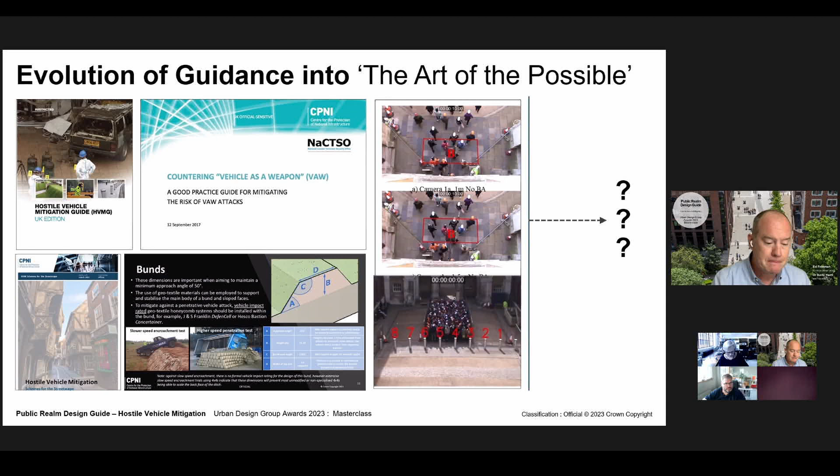There are several key changes in this latest edition of the guide. One is that the guide places a greater emphasis on the protection of people rather than assets such as buildings, which is in response to new emerging threats and terrorist techniques. The guide also considers risk management as addressed in the UK government's emerging Martyn's Law, previously known as the Protect Duty. This update also presented the opportunity to refresh the graphic design, improve accessibility, and coordinate with other updated guidance.

The key overarching message of the guide is to encourage creative thinking, underpinned by a clear understanding of the technical requirements for hostile vehicle mitigation, with an emphasis on a design approach that is site-specific and proportionate to the risk.

As part of a collaborative consultation process, we selected a steering group of professionals, designers and leading thinkers to join us to test, challenge and inform the development of the guidance, with the aim of making the guide as relevant as it can be to design professionals and their clients.

We are delighted that the Public Realm Design Guide has received the endorsement of many of these key organisations you can see on screen, many of which were represented on the steering group. These endorsements are key to encourage the use of this guide, and we are about to commence a series of nationwide seminars to disseminate the guide amongst the professional community.

The guide itself is set out in 7 parts, designed with colour coding for ease of navigation. The intention has been to make this a largely visual document to appeal to the creative profession and to demonstrate technical concepts in clear graphical style.

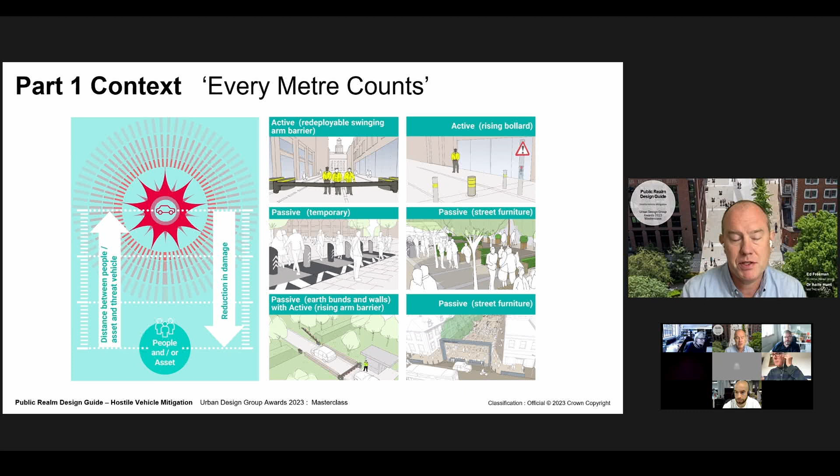One of the main purposes of the guide is to provide inspiration for creative responses that provide multiple benefits for the public realm. Part 2, Pre-Design, discusses risk, how designers and organisations can assess risk and make informed decisions about the management of risk. To assist with these tasks, links are provided to detailed guidance on the risk management process and for developing a project security plan, amongst others.

It's important to identify stakeholders and encourage stakeholder engagement at the outset of a project so all can work together until residual risks are reduced to as low as reasonably practicable.

Successful security is most effective when a layered approach is taken from the outer district to the threshold and finally to the site itself. Each of these have different constraints and opportunities, and the design considerations and potential opportunities for each of these layers are illustrated later in part 5 of the guide.

HVM can also provide a number of benefits to an area: public reassurance, reducing antisocial behaviour and crime, reducing vehicle speeds and improving road safety, reductions in air and noise pollution, and opportunities for artistic features and increased biodiversity through greening.

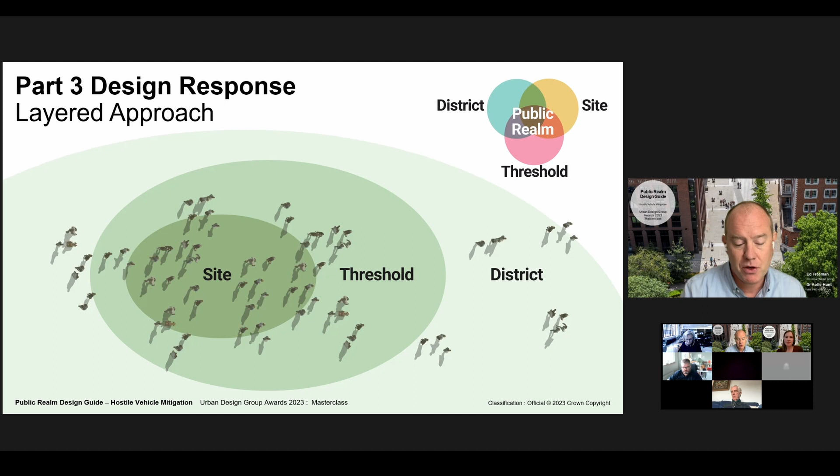I'll now pass over to Aoife to present a new section of the guide which offers advice on pedestrian flows and the consideration of pedestrian movement.

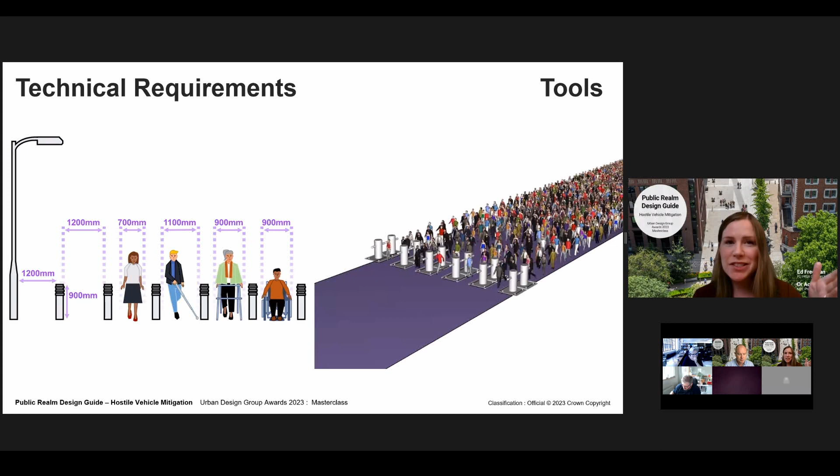And finally, it looks at the types of tools and methods that can be used to support planning. Here's an example of a micro-simulation model that can test how different types of barriers will operate in large crowd footfall. This was for a stadium, but could also be applied to a busy station or other types of areas with high footfall.

And there are lots of other methods out there to assess people movement and behaviour through urban design. So this section in the Public Realm Design Guide really advocates a people-centric approach, where behaviours, preferences and social context are considered as a core part of the design process.

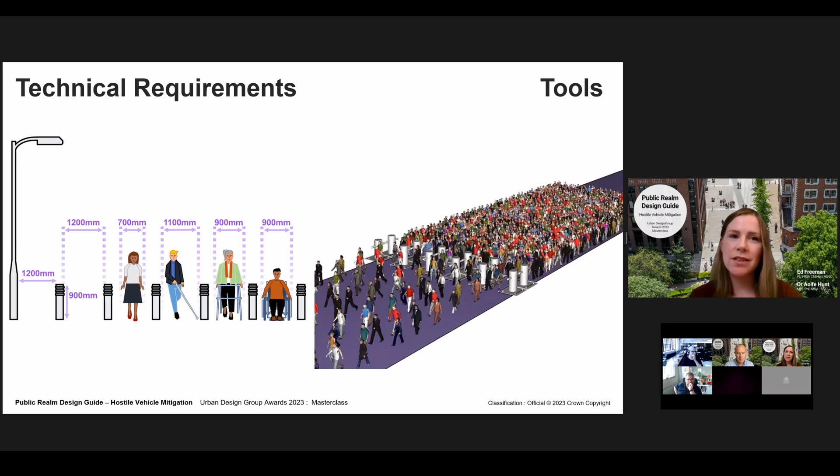Back to you, Ed. Thank you, Aoife.

So yes, Part 3 also provides technical requirements, as Aoife was mentioning, for the detail of VSB elements, to allow designers to provide creative solutions based on the security requirements. This information is based on extensive research and crash testing at the Transport Research Laboratory.

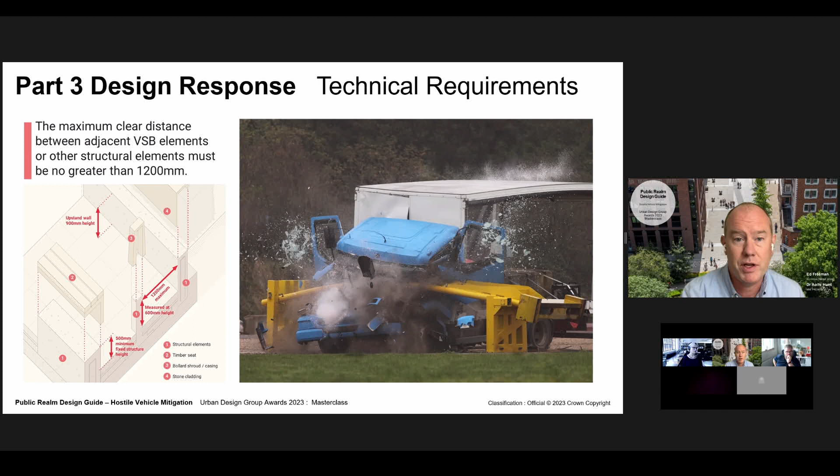At the wider district level, controls can be implemented at a range of scales for maximum effect.

Strategies to reduce the ability of hostile vehicles to access an area and reduce their speed can involve site planning, traffic management and control of vehicle access. Whilst measures have the potential to provide wider benefits from multiple assets, they should also avoid the risk of displacing vulnerabilities elsewhere.

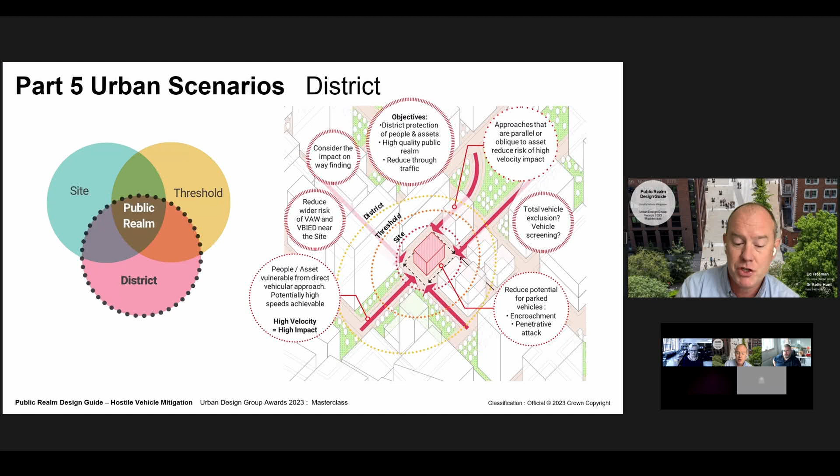Part 6, Process, provides a reference for studies and assessments to be undertaken and actions to be considered at each of the key work stages, including preparation and briefing, concept and technical design, completion and in use.

And Part 7, Appendices, provides links to other organisations and technical guidance. There's also precedent images of HVM measures or features that have the potential to be adapted as required to provide HVM, covering a variety of urban contexts.

HVM, covering a variety of urban contexts. The locations of each precedent are also listed to allow self-guided visits for research.

I hope this overview of the Public Realm Design Guide was informative, and we would encourage all of you to visit NPSA's website to view and download the full guide.

I would just like to end by saying that this guide has the ability to save people's lives, and we welcome your support to create a safe, resilient and sustainable public realm for all. Thank you.

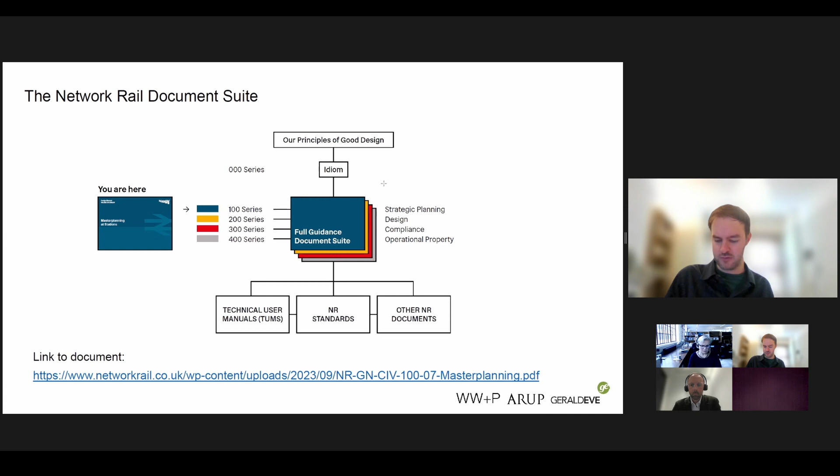So this sits as part of a wider suite, and the aim of the suite is to take Network Rail's principles of good design and then help a range of users, from designers to stakeholders to client teams, implement and understand that, and explain how standards can be implemented. The whole purpose of the suite is that it's accessible, engaging, and informative, so it can be easily interpreted by a range of users and readily implemented on projects.

It's part of a wider project that goes from strategic planning documents such as this one, through to design manuals for specific elements of stations, through to compliance manuals. As this project's gone on, the number of manuals has grown as there's been requests from users for extra topics to be covered, and this has been a rolling program where there's been some great feedback on the documents as they continue to develop.

Just to share some of the other documents we've been involved in, we've worked on station design guidance, inclusive design, heritage, vertical circulation, to name a few, and there's a much wider suite. The key focus of all the documents is to make them really informative, to provide examples throughout, and to give case studies that users can follow so they can see how it relates to their project, making the advice suitable to a range of projects and scenarios rather than a one size fits all.

So for this document specifically, the audience is project managers, sponsors, design teams, heritage groups, the train operating companies, but on a broader level, it's there for local authorities, developers, owners, investors, people that might not be used to engaging with Network Rail, and people that may not know some of the technical challenges of a station. It really helps unpick that, and helps them understand what the requirements for a station master plan are and how they can successfully work with that.

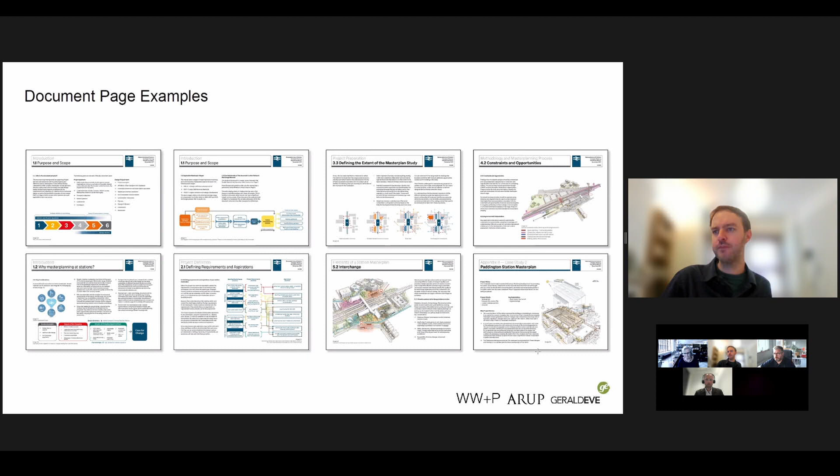We set out at the beginning how users would develop their master plan, what they're trying to achieve, what their case for change is, and how they would develop that into their aspirations, how stakeholders would feed into that, through to how they might apply for funding.

It then goes through to helping people define the requirements for their master plan, looking at their governance structure, identifying how they might procure it and develop a brief, and then through to the process of developing the master plan and implementing it, explaining the different touch points as you go through.

We talk about the different needs of a station master plan and really try to explain to users that aren't necessarily used to a rail environment what the technical challenges are of a station, the wider sphere of influences in terms of interchange, multimodal, bus, and what the purpose of a station public realm is, not necessarily for station users, but for the broader area.

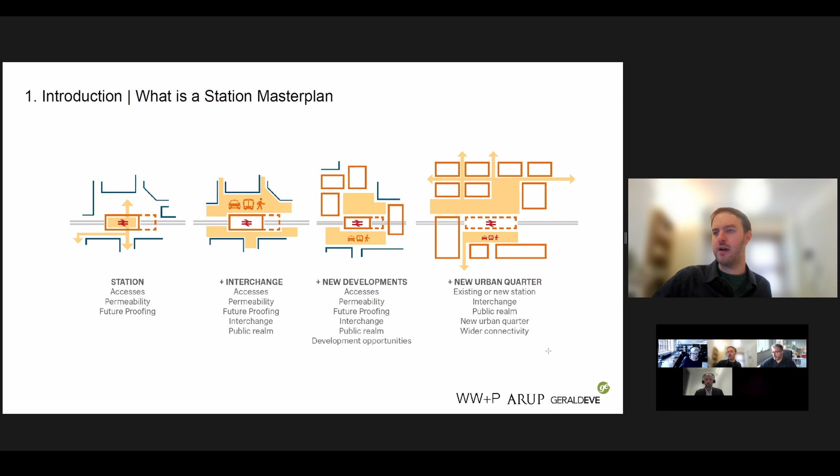We then talk about what the needs of a master plan are and what different development needs are, and then the broader areas and how the station can have an influence on the wider area.

We talk about the need for master planning at stations, the importance of connecting a station with its environment, opening opportunities for growth, breaking down some of the barriers that often exist with stations where they really do cut through areas and sometimes disconnect them, and how the station and wider master plan can connect and open up multimodal travel.

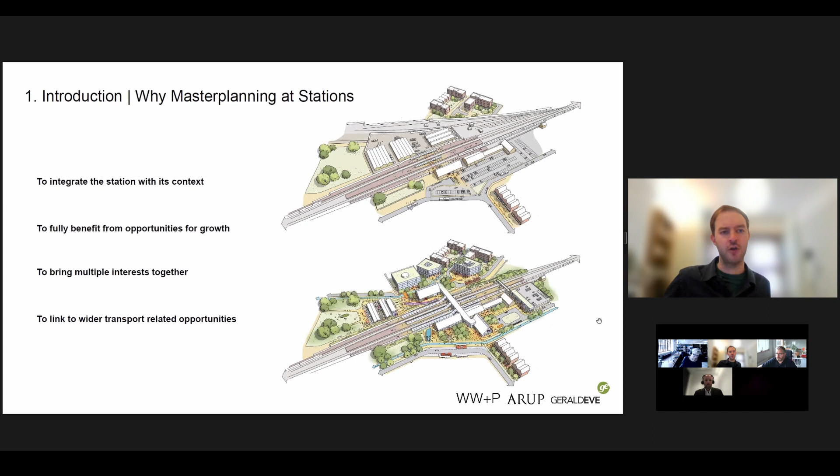We talk about the different stakeholders of a project, and how you could develop your stakeholder matrix, when you might engage with different stakeholders at different stages of the project, how you might do that, and how you might develop that specific need for your project.

We then go on to give some examples of what a requirement might be for a project and what some of the issues, the problem the project is trying to tackle, are. The idea is that users might go through and relate to some of these, or use this as a way to unpick their own specific issues by looking at these examples.

We then help people understand what the extent of their master plan is. You get certain station master plans that are very focused on the station, a sort of inside-out approach, looking at areas around station ownership and unpicking station challenges.

Others develop much wider areas around potential development plots, maybe areas of rail use that are being disposed of, or other areas adjacent to the railway. Then through to much wider, more holistic master plans along the rail corridor, along a wider area.

And we help users understand what the specific challenges of their project are and how they might challenge the boundary, both from a client perspective or from a designer or developer perspective, if there's something in place that doesn't match with the emerging needs of the project.

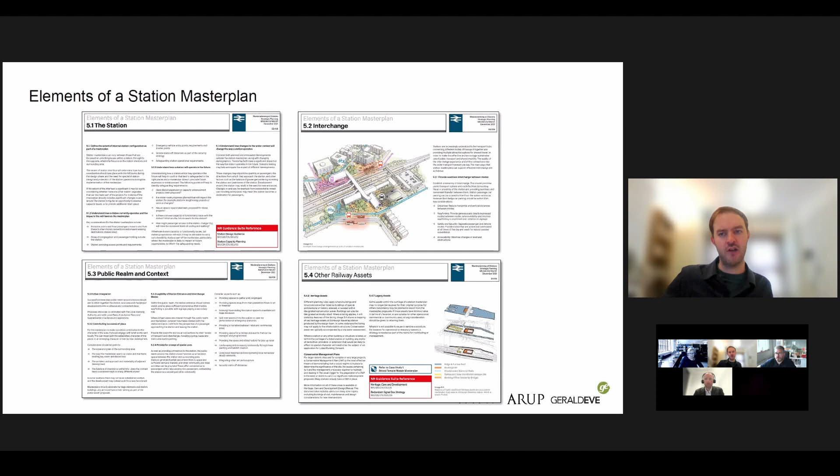We explain the different spatial and technical challenges of a master plan, of a station and station master plan, and what the different operational needs are for a railway, particularly for users coming to this document without a railway background, so they can understand exactly how they can develop a master plan without precluding both the function and needs of the station, both in the current time frame and in the future, when the station may be growing, developing, or have its own needs that need to be taken into consideration and developed as part of the master plan.

Tom, do you want to talk about the optioneering?

Yeah, so this is very practical guidance, and I think this is the value of a document like this, because anyone can look at this. There's worked examples as Max described, and when we talk about things like optioneering, how you begin to shortlist, how you look at a do-minimum scenario or a do-maximum scenario, and everything in between. It talks about the criteria that you could use to go through that shortlisting exercise.

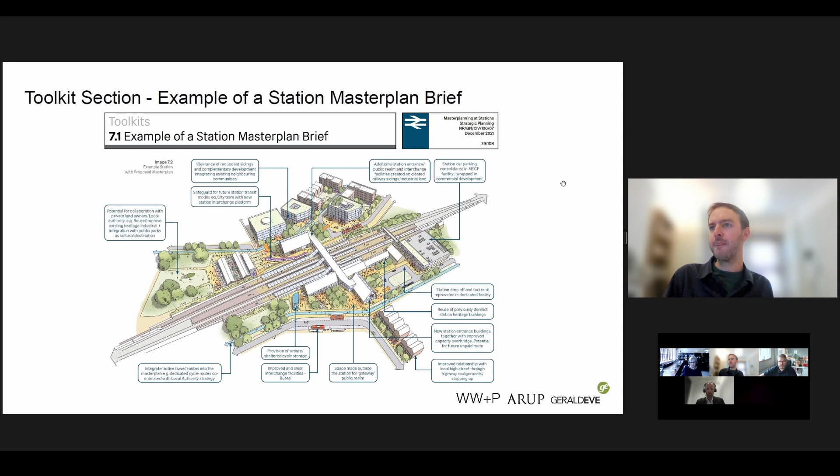Thanks, Max. Really interesting document, or suite of documents, you've been involved in. We've got one question in the chat so far, similar to one I'd written down myself: someone said they've been involved in station redevelopment and struggled because of a one-size-fits-all approach to station design features. How much flex for context and scale is there within the guide?

In terms of context, it covers different spheres of influence around the project, from ones really tightly focused around the station through to much wider areas. It explains that there are different needs for certain projects—some challenges go further along the rail corridor or area, while others are more tightly focused around the station. We also set out a scale against DFT's different station categorizations, ranging from the smallest category F unstaffed station through to the largest stations in the country, and what their extra needs are. So users can see the extra levels of detail or provision needed at a larger station compared to a medium station, and use that to help develop their brief.

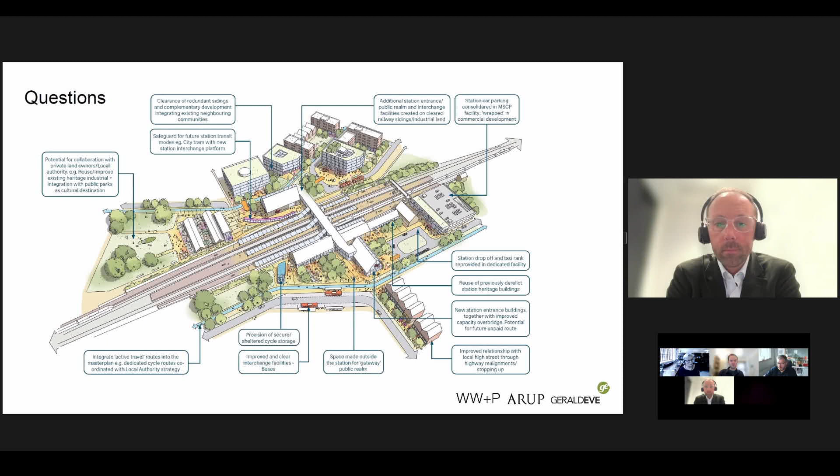Yeah, okay. The next one is around any associated guidance for station interchange areas relating to best practice in terms of proximity to bus interchanges, taxis, parking, cycle hubs etc. I guess that's kind of all covered.

Certainly the slide on screen at the moment suggests those interchanges and proximities are covered in the guidance. Being part of a wider suite of documents, this talks about what that means in terms of master plan and how to allow for and provide for it. There's also a public realm document that's come out as part of this suite, which the document refers to, and at several points across the document it points to other documents in the suite that go into more detail on specific requirements, station capacity being another one.

This document sets out how you could develop and meet the needs of a station, but it doesn't go into some of those specifics. It points you to those, so really you find your way into the suite. In this case, it might be an external developer coming in looking at the master plan, but it'll then set them where they can find out more about interchange, where they can find out more about sizing and provision.

One more question. Who is the guide designed for? Who is the guide intended to influence, inspire most of all? Who are the key decision makers, and who can actually instruct based on the advice set out in the guide?

There's probably two aspects to that. One is people commissioning or developing master plans, that might be internal to Network Rail or the public realm, or external developers and teams with projects near stations who don't necessarily understand the station requirements or how to engage with Network Rail. This helps people understand how they can develop their project with Network Rail as a partner. The other side of the document is how design teams can carry out a successful master plan, how designs can be reviewed, how options can be analysed, how business cases can be developed.

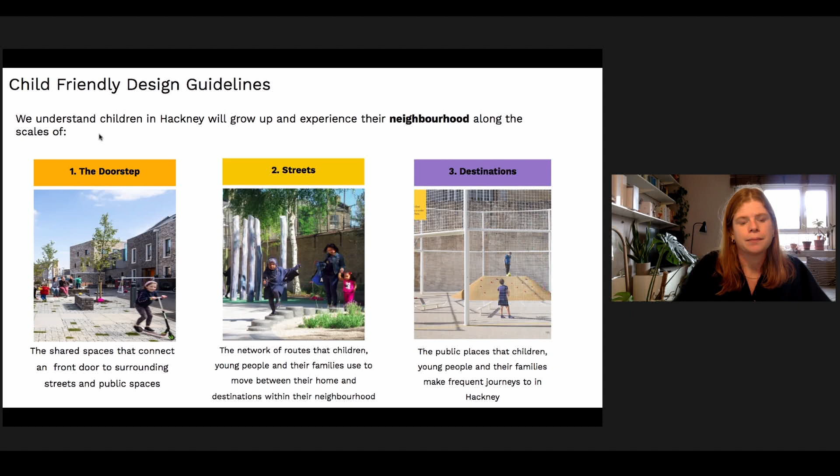We see that the checklist can be used across a variety of scales of designs and planning applications. We did make it mandatory in the guidance for all applications where there's a child yield of 10 or more, a child-friendly impact assessment must be completed, which includes this checklist. But it's also the intention that the checklist is used through the design process as early as possible. So we really encourage design teams and applicants to consider using the checklist from the early stages, through the pre-app process as well.